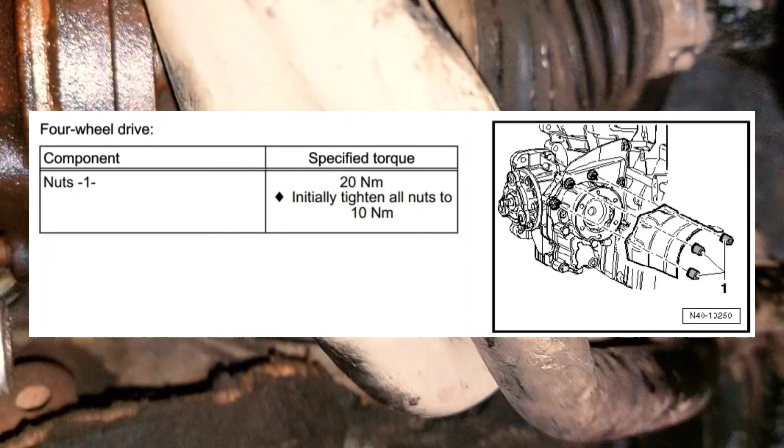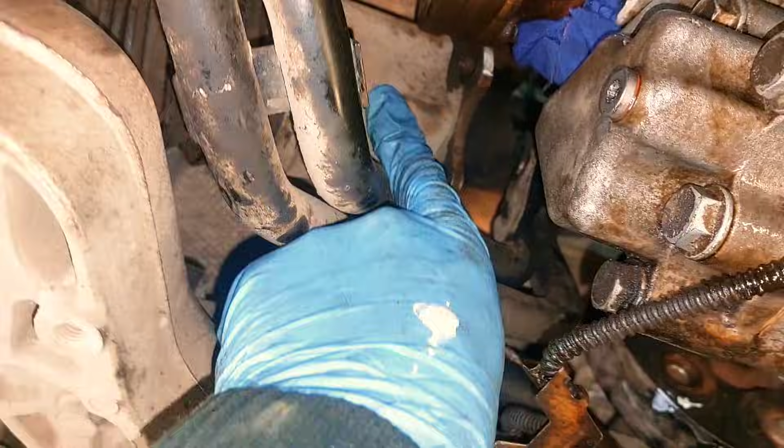Then from the bottom you need to remove this cover of the axle, using 8mm bit under these nuts. Then you need to undo 6 bolts of the axle. You will need to disconnect axle drive, bolt M10.

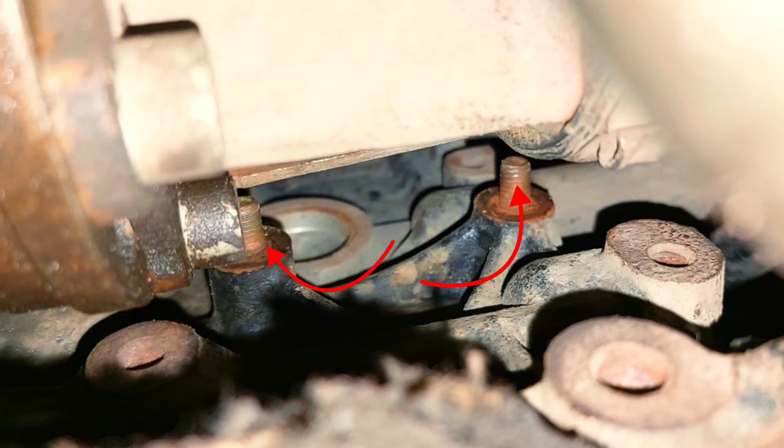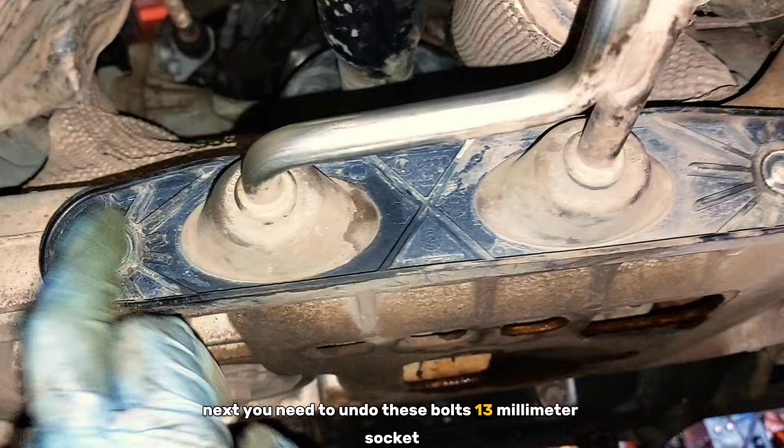These 2 nuts. Then undo lower bracket of the DPF over there. Next you need to undo these bolts, 13mm socket, the exhaust pipe, undo this. And before you remove prop shaft, mark position of this prop shaft to the flange of the bevel box.

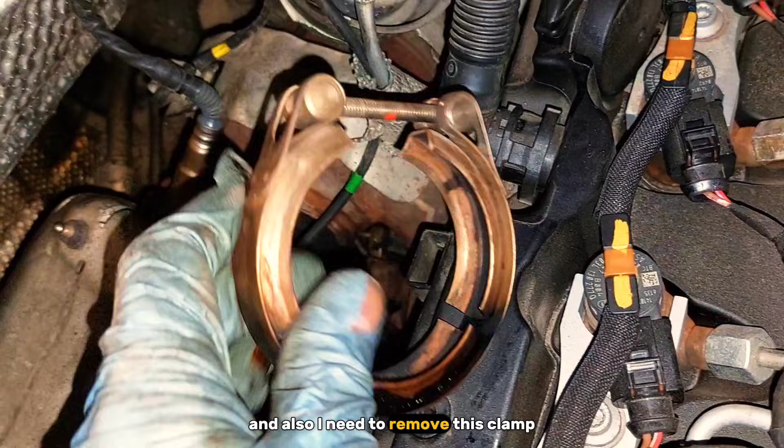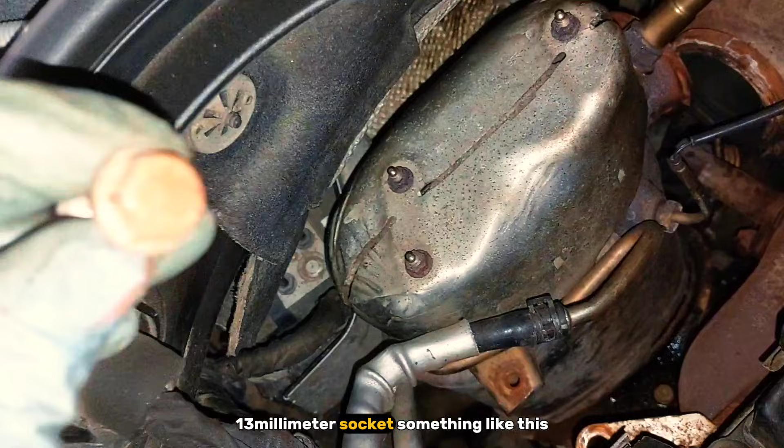Multi-square socket 10mm and 16mm socket under this lower bracket. And also remove this clamp that goes from the turbocharger. You need to undo this bolt over here, 13mm socket, like this, 13mm socket to undo these 2 nuts, with this mounting bracket to remove it.

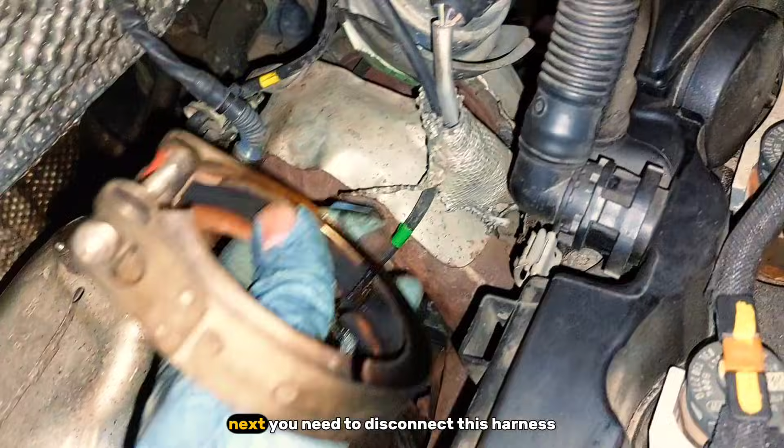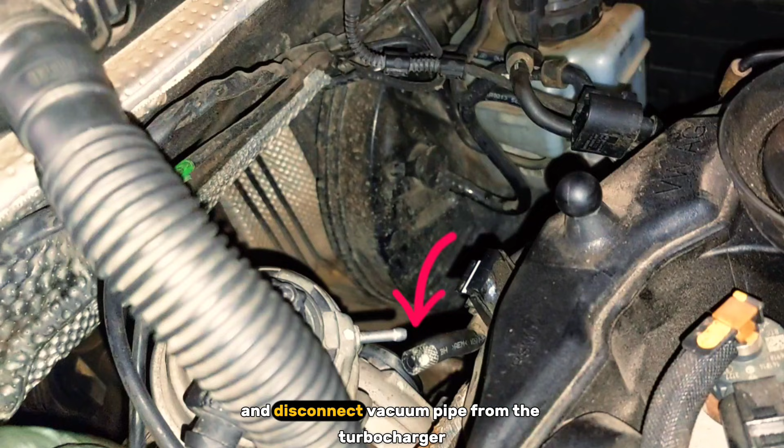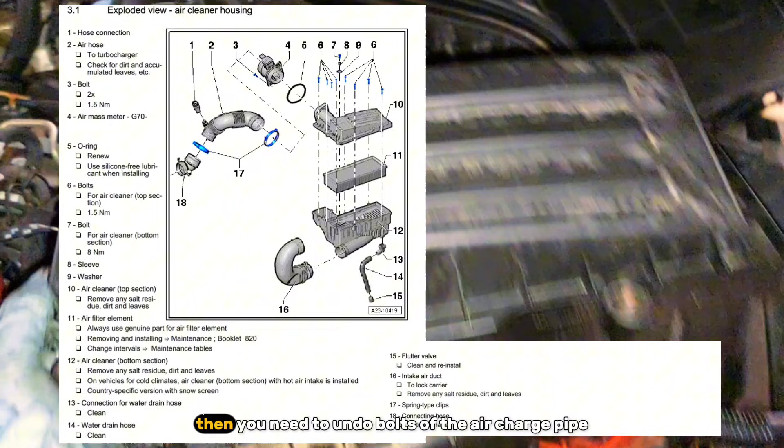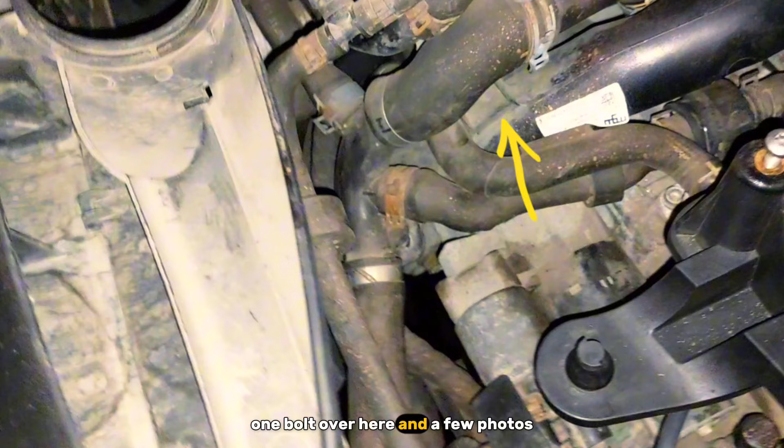Next you need to disconnect this harness. And disconnect vacuum pipe from the turbocharger actuator. From here you need to remove this housing. Then you need to undo bolts of the air charge pipe with Torx 30. One bolt is over here, one bolt over here, and a few photos for better understanding of where these bolts are located. One bolt of this air charge pipe is located on the oil sump.

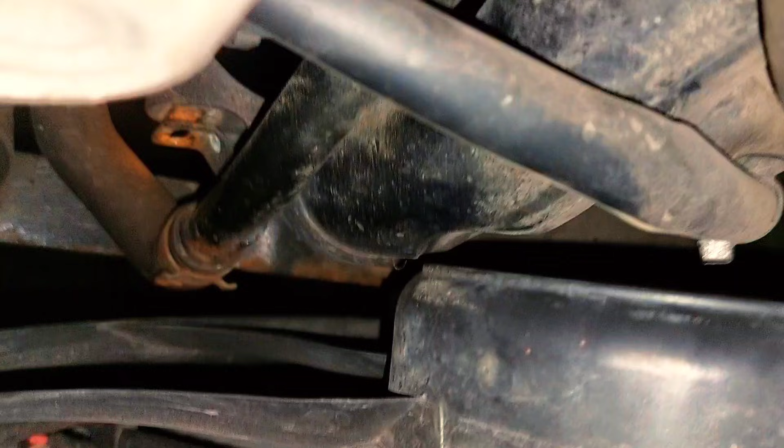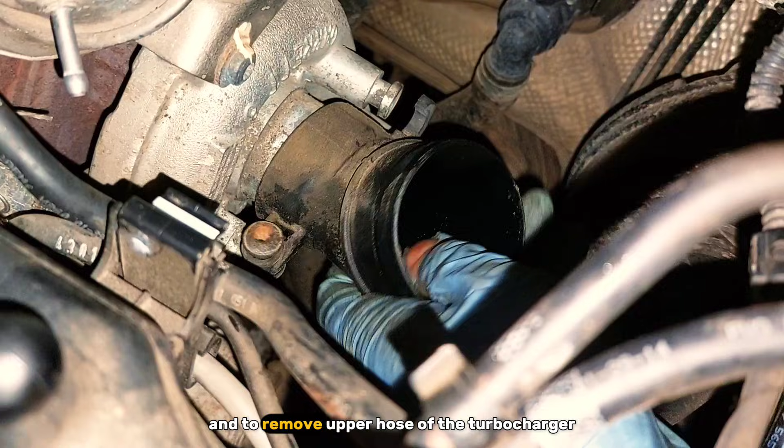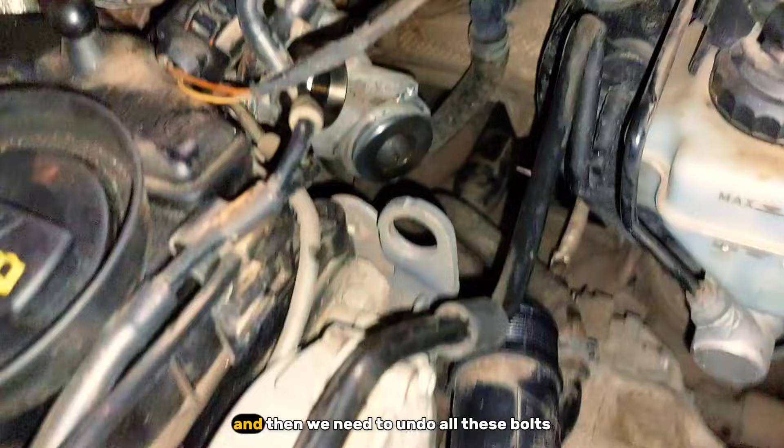Here. Next you need to remove plastic hose of the turbocharger. And to remove upper hose of the turbocharger you need T30 socket and rotate this hose clockwise to take it off. And then you need to undo all these bolts. These two for this cover, T30 nuts.

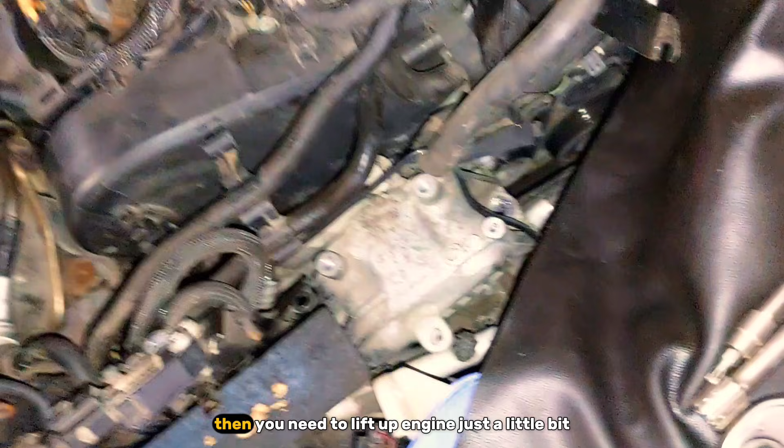Then you need to lift up engine just a little bit. Then just simply move engine forward and put some brick to the mounting bracket so it does not move backwards. And there is some special device that you can put between engine and subframe. Also you can remove this PCV pipe.

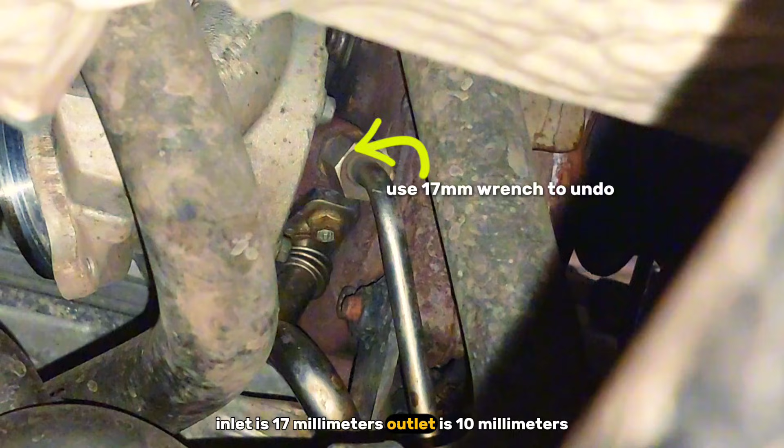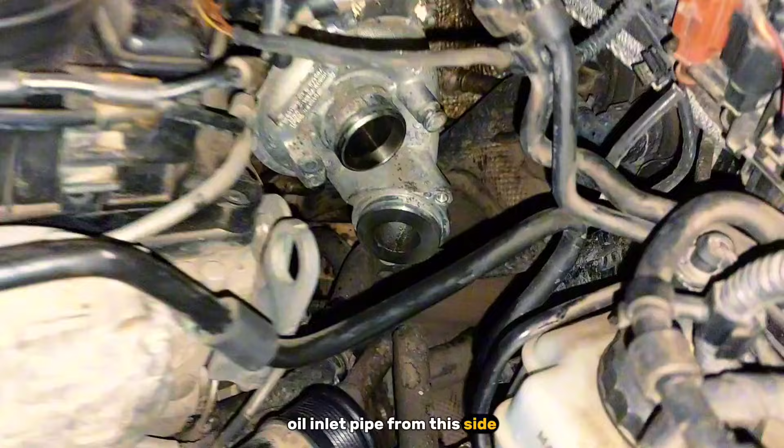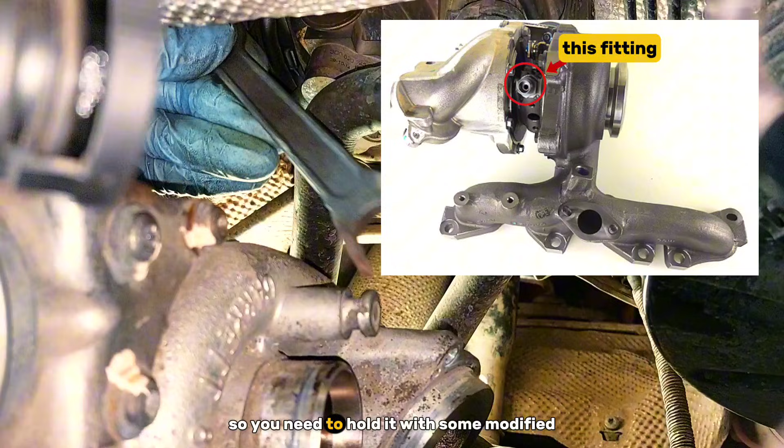Inlet pipe and outlet pipe. Inlet is 17 millimeters, outlet is 10 millimeters socket. Just like this you can undo the turbocharger oil inlet pipe. From this side it will be much easier. And sometimes nuts of the inlet pipe can undo with fitting, so you need to hold it with some modified 17 millimeter wrench with cut edges.

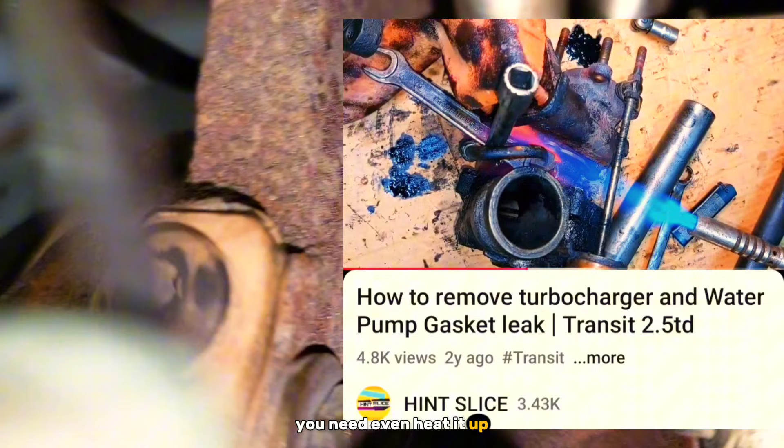And it goes like that. So this is the fitting that can undo with nut of the inlet pipe, and sometimes you even need to heat it up and smash it a little bit to take it off. And one bolt that holds outlet pipe and connects it with turbocharger.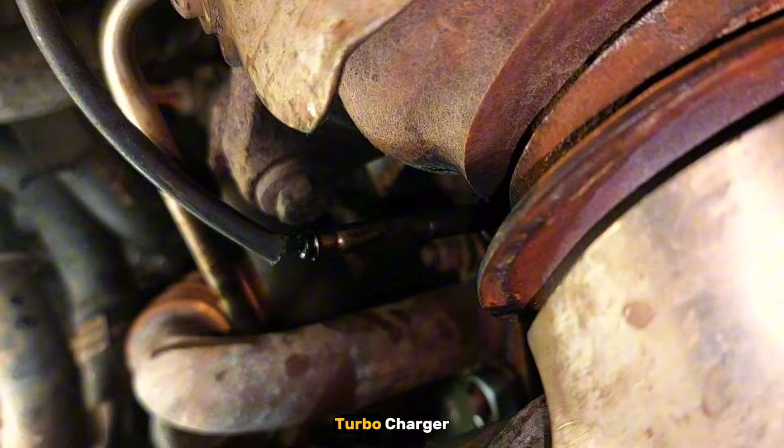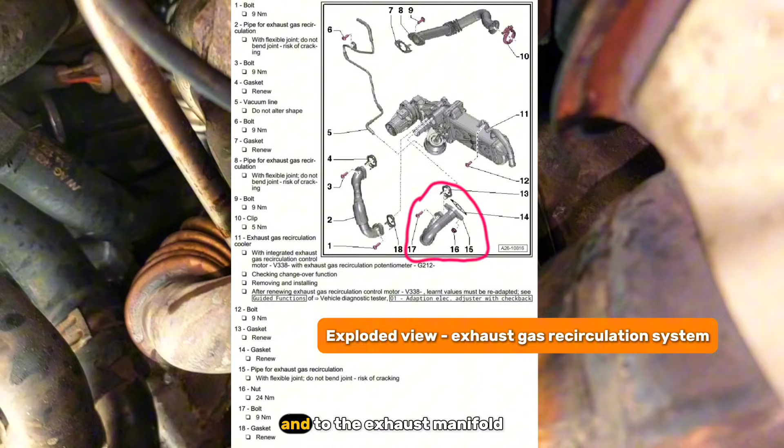It's 12 millimeter socket and T30 socket to undo and fully remove EGR pipe that goes from the EGR cooler to the exhaust manifold. And second pipe you need to undo only from the cylinder head.

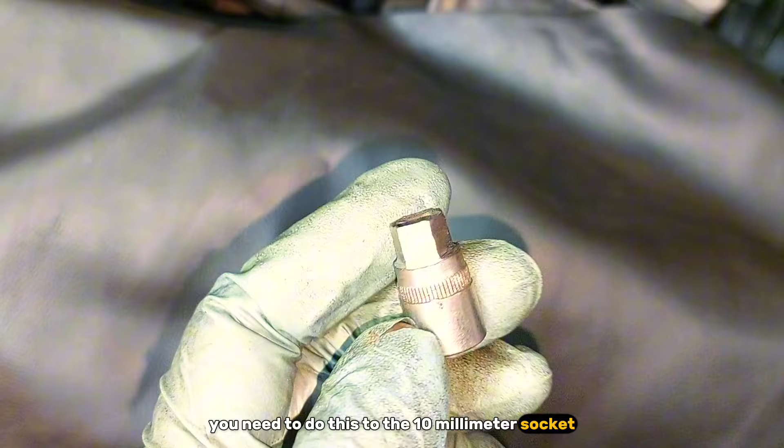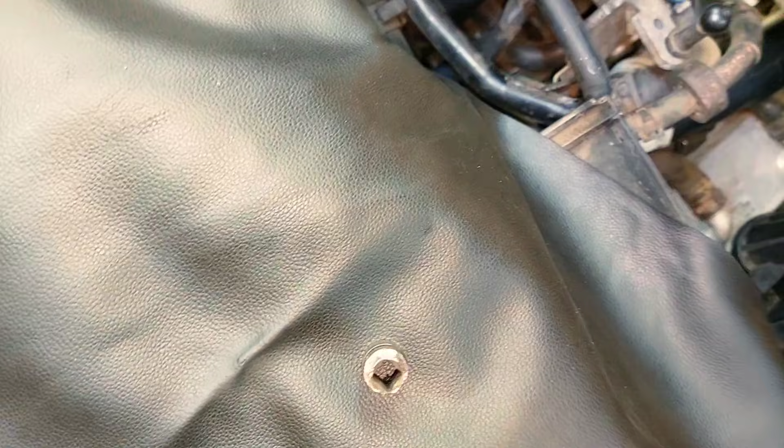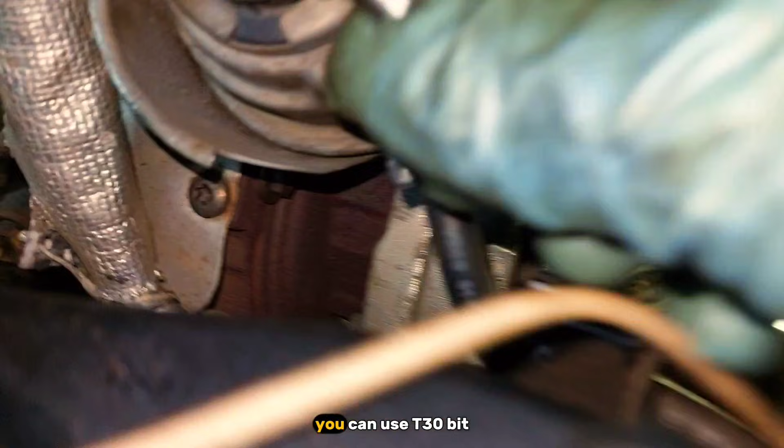To undo those bolts of the outlet pipe, you need to do this to the 10 millimeter socket. Just a little adjustment. So this wrench you can put like this and undo those bolts. Or you can use this one, but it doesn't fit so good. And when the bolts are loosened, you can use T30 bit socket or bit. You can undo this bolt, hold it with magnet.

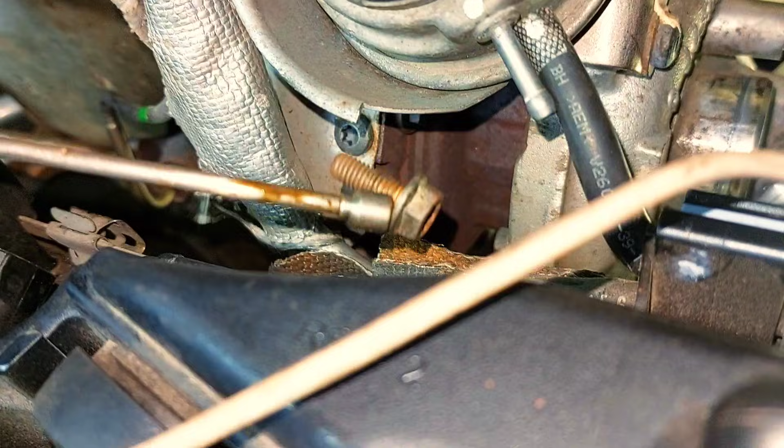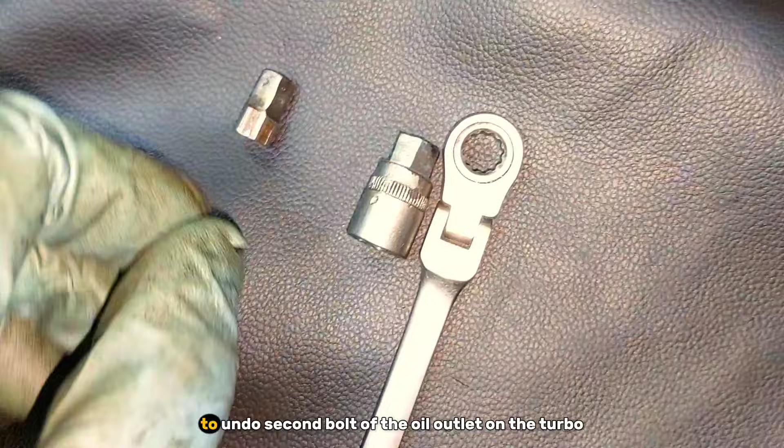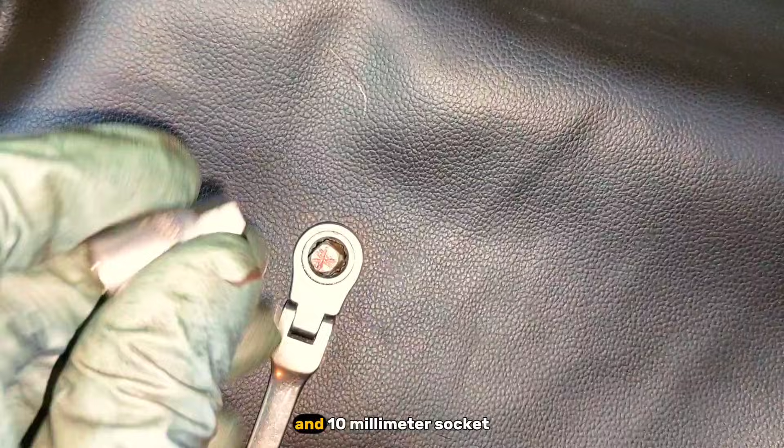And the other bolt, the second one. It looks like this, so you can use 10 millimeter socket or T30. To undo the second bolt of the oil outlet on the turbo, I'm using this adapter to 8mm wrench, like this type of wrench, and 10mm socket. And you can easily undo this freaking bolt over there.

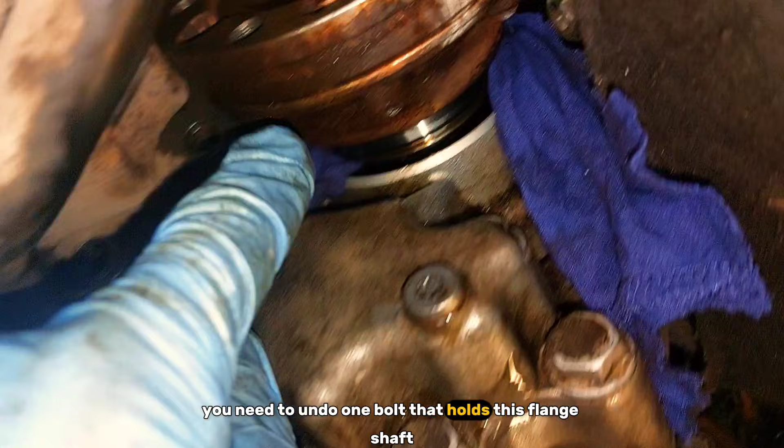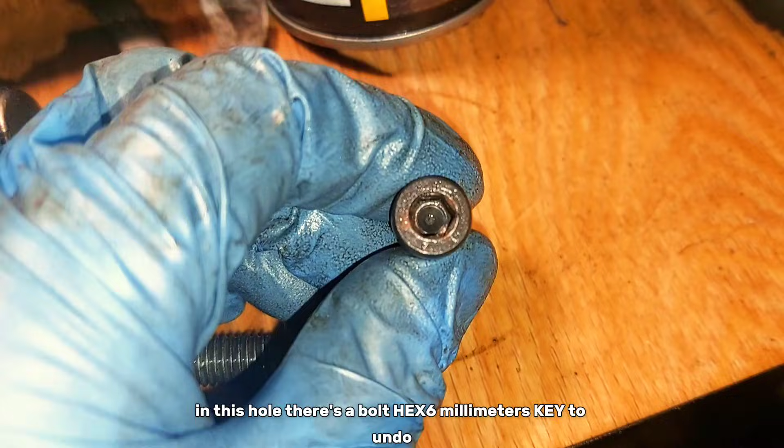So CV joint is detached from the flange shaft of the bevel box, and you can fully remove flange shaft from the bevel box, but I don't have time for this, so I just push it out a little bit. And to do so, you need to undo one bolt that holds this flange shaft. In this hole, there is a bolt, 6mm, and you need something long like this.

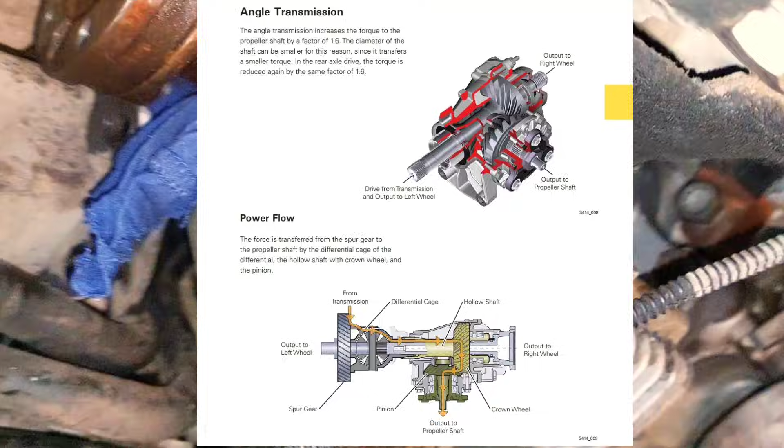And some diagrams of the bevel box and some photos of the bevel box from different angles. And disassembled, it looks like this. Why do I need to remove this one or this whole thing? Because of this bolt of the outlet on the turbo. I need only to loosen this bolt so the outlet pipe can move freely.

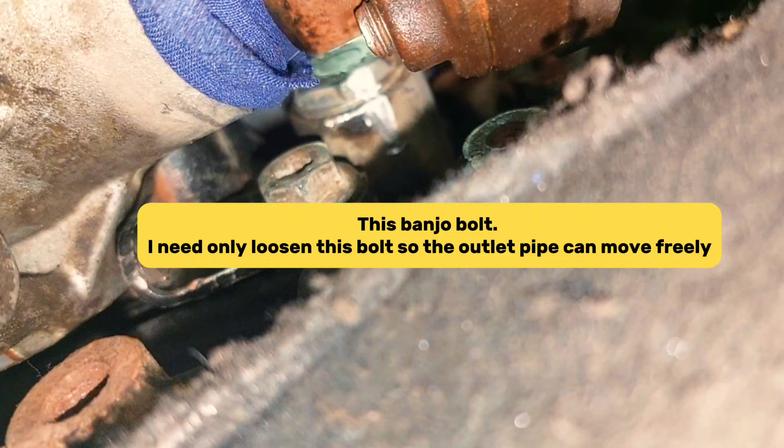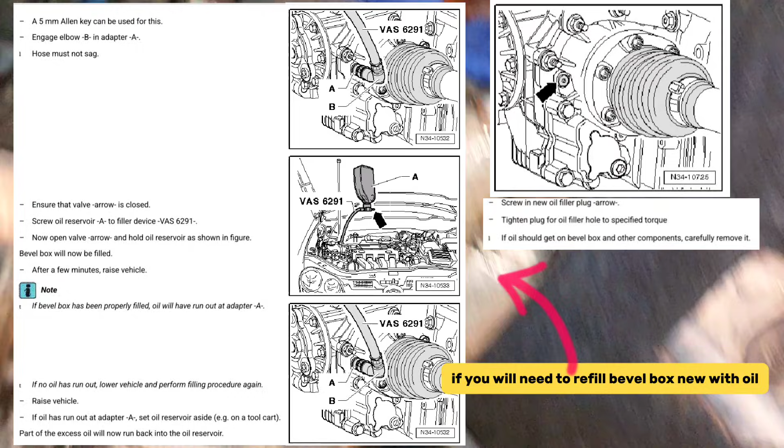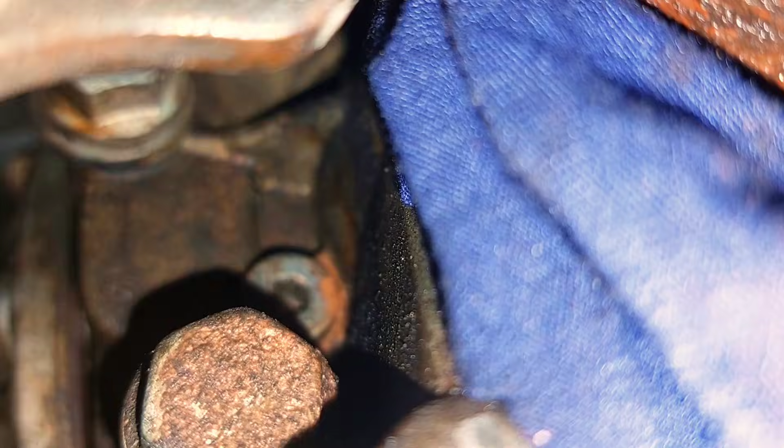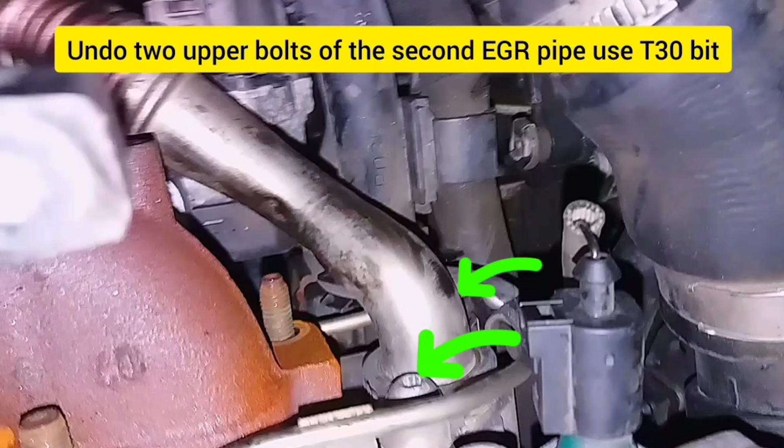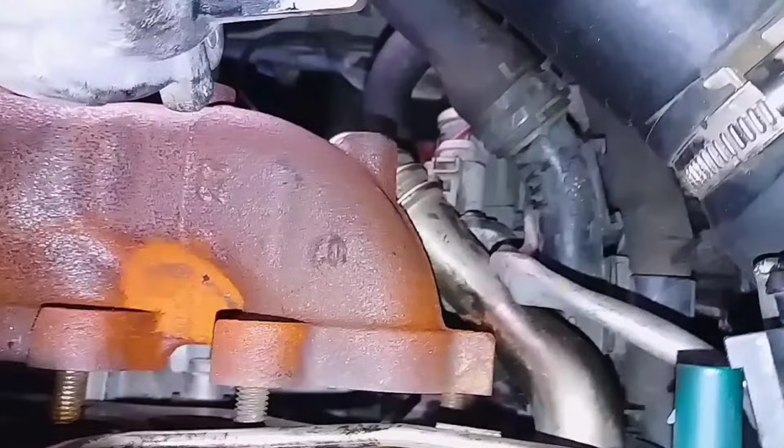Next, undo nuts of the turbocharger manifold and use 12mm socket. Usually these nuts are undone very easily. Now I undo only upper bolts of the second EGR pipe, so it will move and you can remove turbocharger. So now I can move this turbocharger and go up.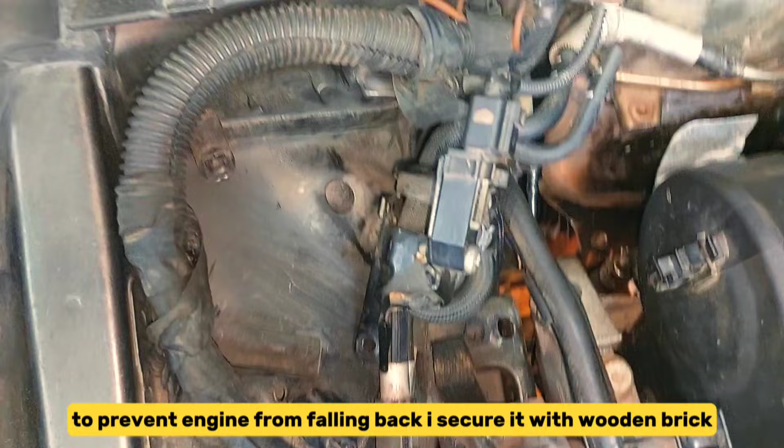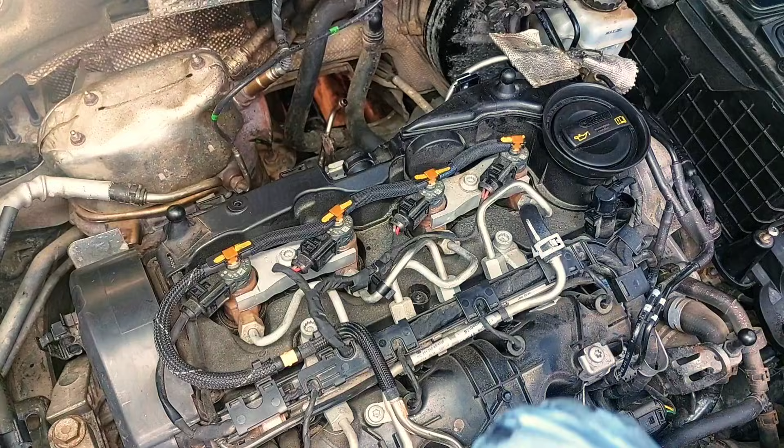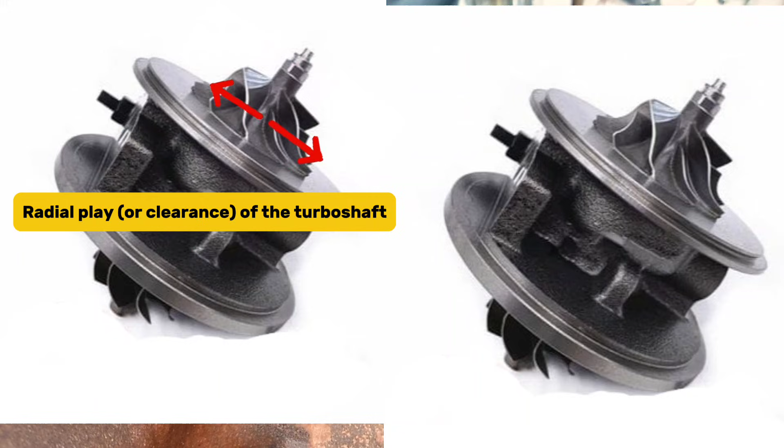That's it. As you can see, radial play of the turbo shaft is not acceptable, which means that core of the turbocharger is now trash. Number of this turbocharger: 03L253010F. To take off this manifold, you will need to